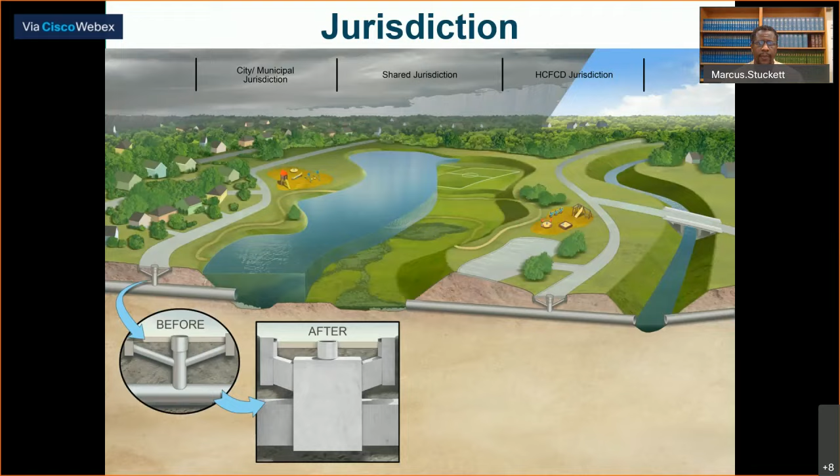On August 25th, 2018, Harris County voters approved $2.5 billion in bonds for flood risk reduction projects. This vote followed a series of meetings across Harris County in each watershed, resulting in a list of 181 bond projects, including more than $67 million in projects, plus funding for home buyouts and storm repairs for the Willow Creek watershed. All Willow Creek watershed projects have been initiated.

A total of more than $680 million in partnership funding received so far stretches the 2018 bond program even farther. The actual timing of individual projects will depend on a variety of factors, including environmental permitting, right-of-way acquisition, and utility relocation.

Project lists and project schedules will be updated periodically.

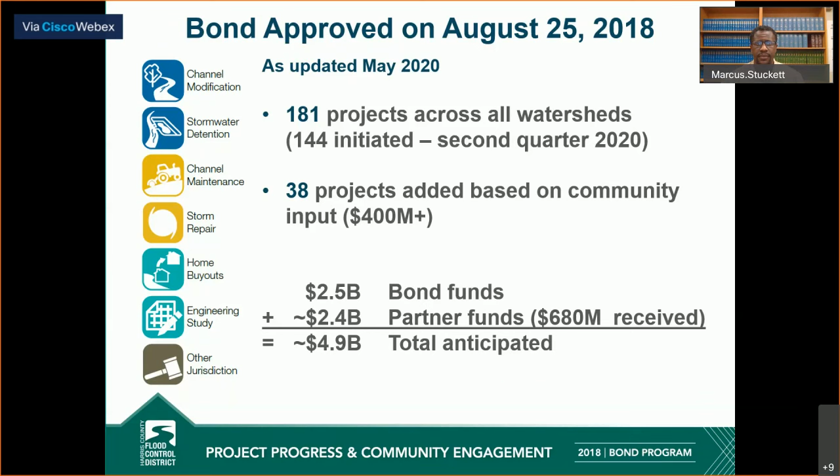I will now move into a portion of the program that's specifically about the Willow Creek watershed and the M124 Stormwater Conveyance Improvement Project.

This project includes stormwater conveyance improvements to the M124 channel, plus stormwater detention. It starts at State Highway 249 and ends at Willow Creek.

This project is in cooperation with the Texas Department of Transportation, which is working with us to address flooding issues along FM 2920. TxDOT is helping fund the M124 project, which will be completed in advance of and will provide drainage for TxDOT's future expansion of FM 2920. The future expansion will also include crossing culverts for FM 2920 to minimize inconvenience to motorists along that roadway.

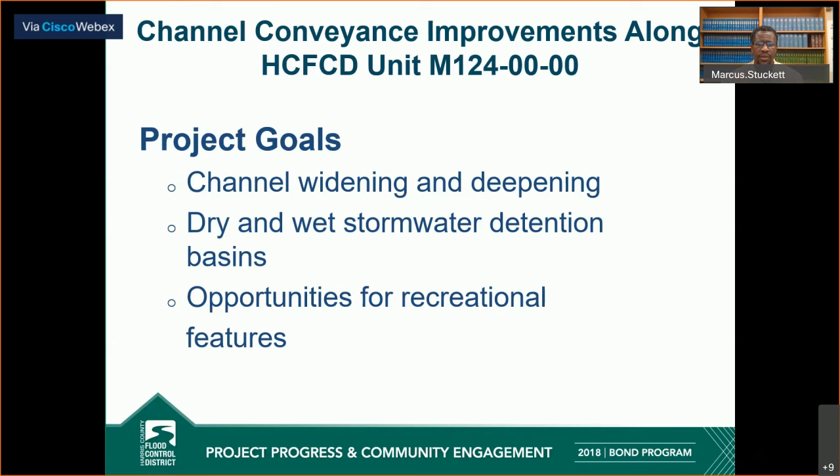We'll now discuss what's coming up in the near future and farther out for this project.

As of October 2020, phase 2 is in the preliminary engineering stage and nearly complete. A final report is expected to be issued November 2020. The final engineering report for phase 2 will consider public input as presented tonight and during the project comment period.

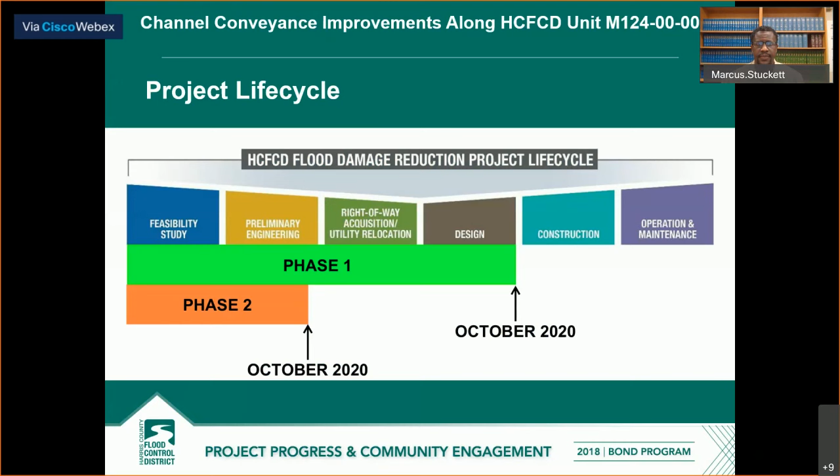The long-term outlook includes constructing phase 2 improvements, which start at State Highway 249 and end at Willow Creek. Phase 2 will deepen the improved, widened channel section constructed in phase 1, continue the channel improvement south of 2920, and provide several stormwater detention basins to prevent impacts to Willow Creek.

The next two graphics will illustrate the final conditions of this project when fully constructed. This includes approximately 4 miles of channel improvements, in addition to 15 stormwater detention basins.

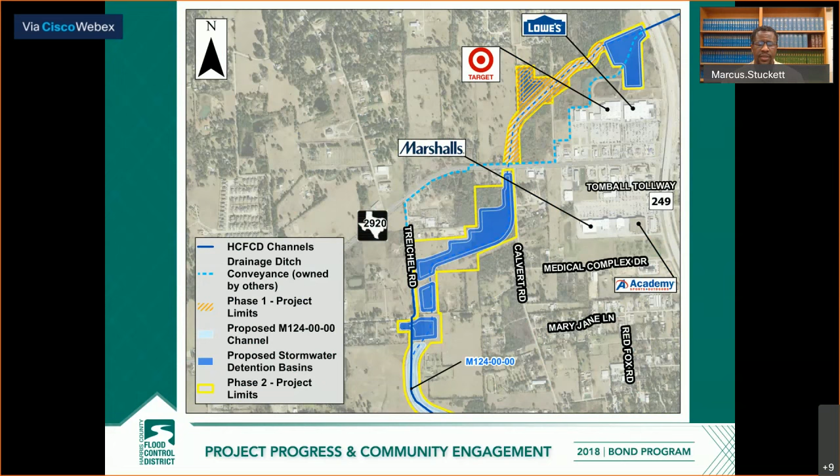This graphic represents the proposed project north of Olin Road to State Highway 249. The blue areas represent the stormwater detention basins.

To recap, the outlook for phase 1 is to proceed to construction later this winter and to be completed in fall of 2021. It is anticipated that the preliminary engineering for phase 2 will conclude in fall 2020. Design will start in winter 2020, and the project is expected to bid in summer 2022.

In order to illustrate the benefits of this project, the following two graphics show north to the left so that we can represent the extent of the project on one exhibit.

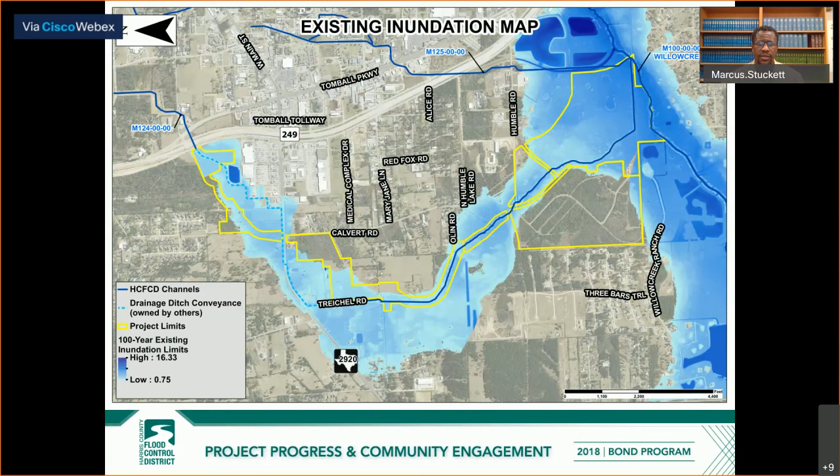The southern portion of the project will continue to have out-of-bank flooding during heavy rain events due to significant water backing up into the tributary from the rising Willow Creek. This backwater effect, shown here in blue, cannot be alleviated by this project.

The next three slides include potential recreation opportunities that may be available through separate projects and funding by a partner agency, as previously mentioned.

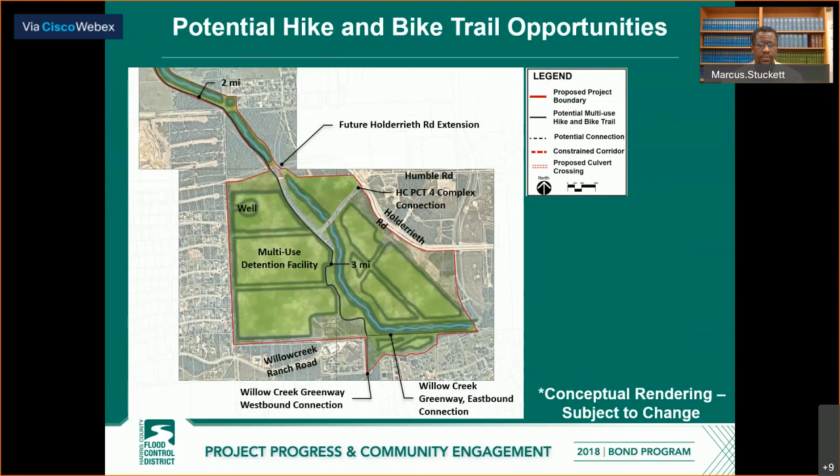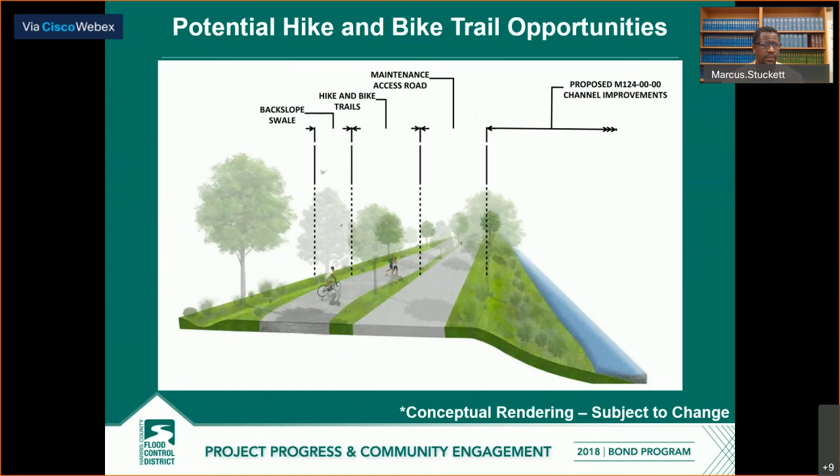Before we continue, let's try again to hear from Commissioner Cagle to hear his message. Friends, this is your Harris County Commissioner of Precinct 4, Jack Cagle. I'd like to thank the hardworking field team.

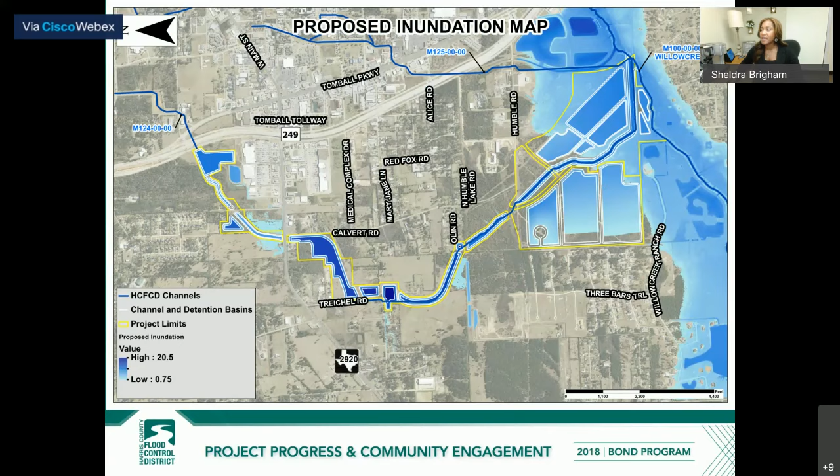Thank you, Marcus. Our next question is from Jim Hudson, and it's for Isabel. Jim is asking, how will this project impact flooding that we have experienced along Willow Creek east of this area? And he puts Northampton subdivision.

I think we probably need to have a more detailed discussion because we can look at the location itself right now. But the project is supposed to be able to reduce flooding along M124, which is the existing channel, plus we're adding an additional section south of 2920 to address the flooding issues in that area.

And I guess we are not creating any additional impact to Willow Creek at this point. So what it is right now, as Marcus said, we are reducing flooding in certain areas. Some other areas will have to have a different project address the flooding within Willow Creek itself.

Thank you, Isabel. Next question is for Marcus. Marcus, what's the difference between a wet bottom basin and a dry bottom?

That's a really good question. So a wet bottom basin is one that has a permanent water surface elevation, typically with a vegetated shelf. Sometimes it contains islands in the middle of it, but it's a detention basin that will always hold water. Depending on whether or not we have a partner, that's used for recreational opportunities, for learning opportunities, trails around it, fish inside, allowing people to go out and fish.

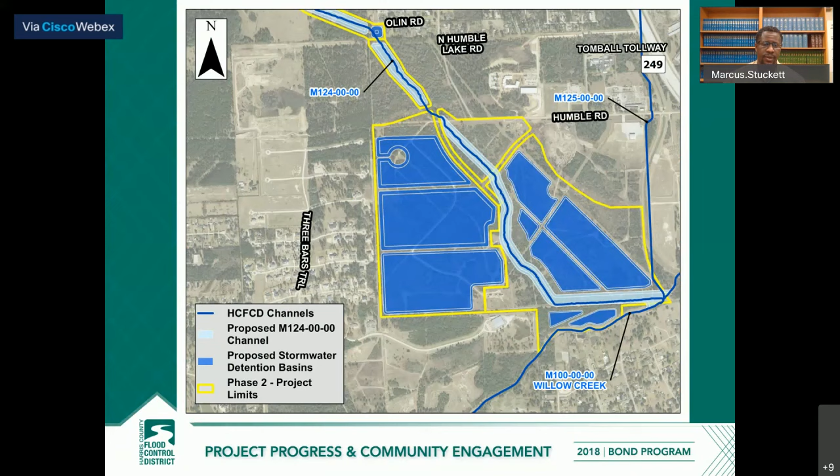Thank you, Marcus. Isabel, Peter Barnhart is asking, when is construction planned to begin? Right now, as we have in our schedule, we are completing preliminary engineering design. As part of our process, we go to property acquisition, which is almost also complete, and then we move into design. At this point, we're working with the engineer.

From the results of the PER, we'll determine, based on funding and availability of relocations we have to do on utilities and permitting, environmental permitting, how we can move to the design process, which usually takes 8 to 12 months to complete. Then we move into bidding and then into construction. So at this point, we're looking into late fall of 2021 to issue some plans and start construction on certain portions of the project. All right, thank you, Isabel.

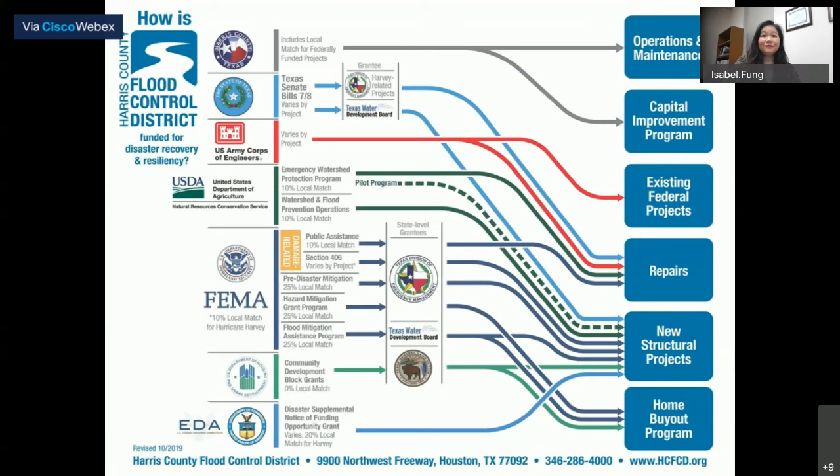We do have a certain amount of right-of-way that we have acquired, and we intend to maximize the volume out of it. Typically we would have 30 to 50-foot maintenance berms on both sides of the channel, and it usually goes down into a trapezoidal section. We'd have probably 4 to 1 side slopes, and the depth would be around 10 feet right now.

The detention basins that feed into it would have either side weirs, and if it's an online detention basin, it'll be part of an expanded area. We look into providing environmental enhancements through those, like riparian sections, so it's appealing to the public, and our berms can be used for hike and bike trails. We reserve some space for that if stakeholders are interested. It could even include park-like features, even the possibility of active recreation, soccer fields or baseball fields at the bottom of the basin that can be used when the area is dry.

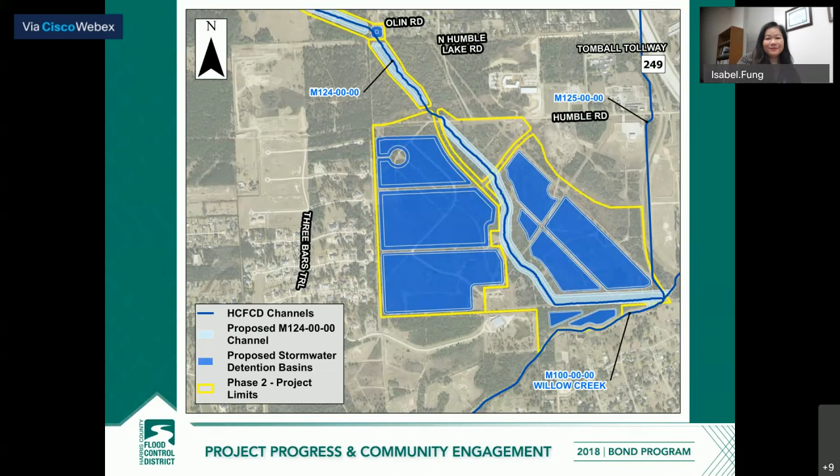Phase 1 actually starts at SH249. You can see there's some existing detention basins that belong to TxDOT right now. The plan is to drain some of that. Right now it's acting as a wet basin, keeping water most of the time, so we're going to drain some of that water. It's going to flow down through the new channel section and into the existing ditch on FM 2920. That's the extent of phase 1.

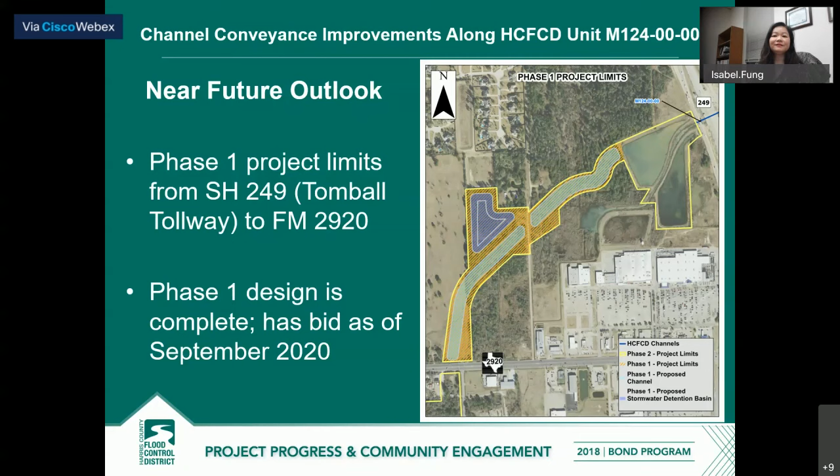It's an intermediate channel, because when we do phase 2, we'll come back to this section and deepen the channel and the basins to match the flow line of the phase 2 section that's going to be constructed just south of FM 2920. Phase 2 will go from Willow Creek all the way back to FM 2920 and then back to 249, where the entire channel will have pretty much the same depth. I guess what we'd like to do is construct that section first on phase 1, then come back and start at Willow Creek and move upstream back towards 249.

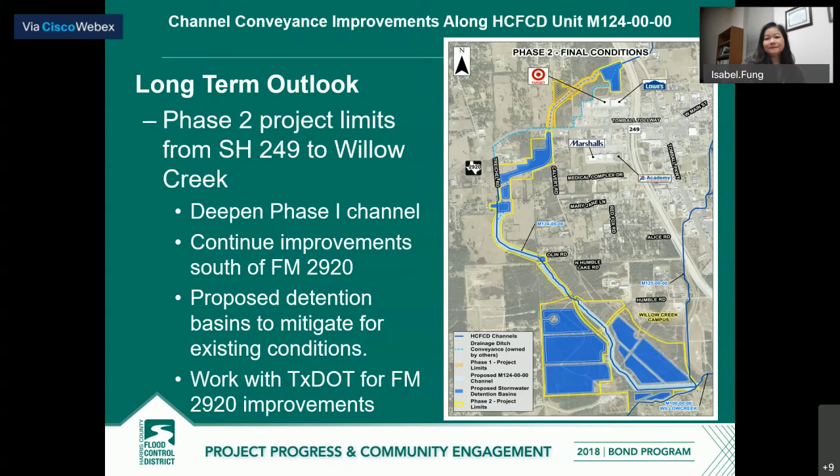All right, thank you Isabel. Marcus, next question: what other options are being considered for this area? It sounds like there may need to be another effort considered for the south portion of the project area since reductions don't extend there.

Yes, and I mentioned this previously, I think when Marilyn Smith asked her question. Those areas along Willow Creek right now are in what we consider the study or feasibility phase for the project. Once we get through that feasibility stage, they'll present it to us as the engineering division with some recommendations for projects. Depending on funding and the recommendations they provide, that's when we'll start working on that southern portion that still doesn't get any benefit from this particular project. The location of those projects and exactly what they are, I don't have an answer for yet since they haven't come to my division, but I know there will be some recommendations and a plan for Willow Creek.

Marcus, you mentioned... oh, Isabel? Oh, I thought she was saying something. You mentioned recreational opportunities earlier. Can you talk more about that?

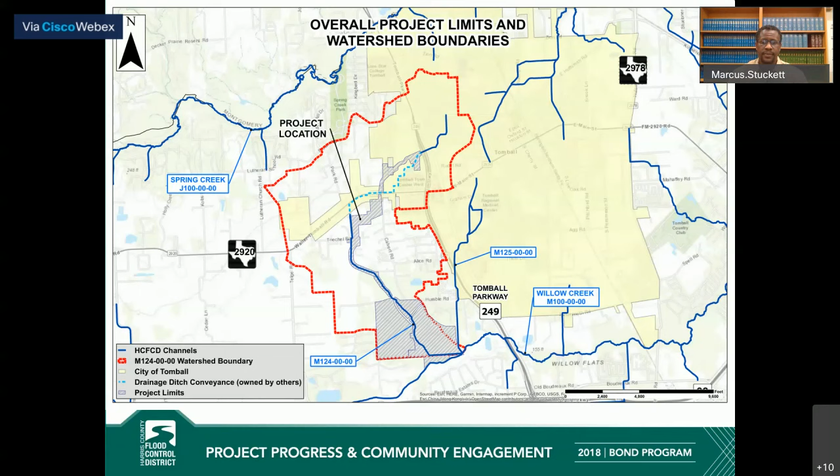Good evening, friends, this is your Harris County Commissioner Jack Cagle. I'd like to thank the hardworking and highly skilled team at the Harris County Flood Control District for their tireless efforts to protect the citizens of Harris County from future flooding. Thank you also for taking time out of your evening to participate in this important meeting. Your continued input ensures our community remains strong and healthy. Tonight's matters focus on future improvements to the Willow Creek watershed, which should positively impact our neighborhood. This provides drainage for 54 square miles around the Tomball and Creekside areas. These improvements will help preserve our way of life and keep these communities a wonderful place to live, work, and play for families. Your engagement tonight is important to all of us at County Precinct 4, and it's a crucial part of the successful operations of Harris County Flood Control District. Thank you again for your time and participation. This is Jack Cagle thanking you and welcoming you to tonight's event.